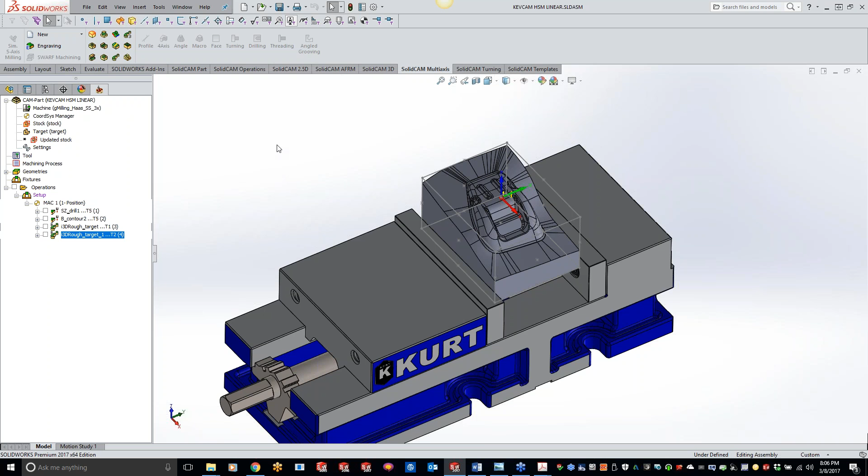So for this particular part here, we have everything roughed out. Just a standard part here, probed it up real nicely, roughed it out using 3D machining with a couple different size tools, and now we basically want to finish off this part. So first thing I'm going to do is add a 3D constant step over here.

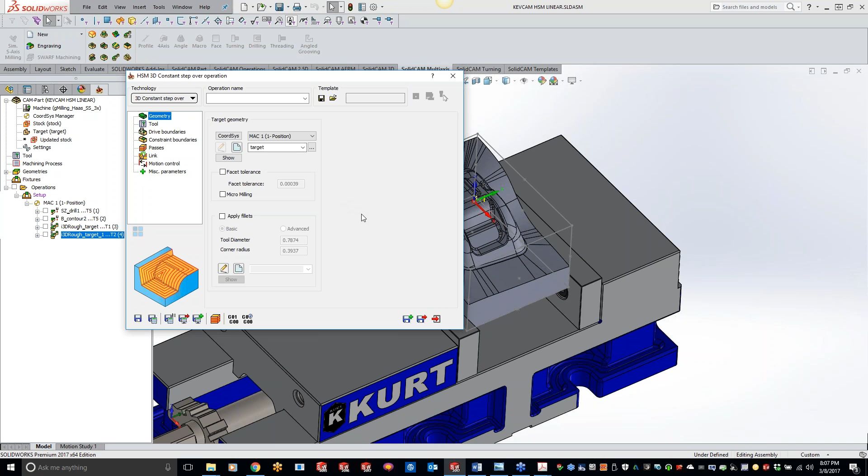Now, a lot of these menus are the same throughout all of HSM. There are a couple new ones in the 3D constant step over, and I'll go over those shortly, what those buttons do, and show you how the toolpath changes. There's a lot in here, and I know it looks a little overwhelming, and that's why we're going through this video series explaining these. But like I said in the past, the default values in here are pretty well set, and it all depends on the part that you're using.

So for this particular one, we'll get the ball rolling, and I'm going to machine it off with a ball end mill. Let me just see what I have. We'll use a 1/4 inch because we've got some pretty small areas in there. And then we'll come back and do a rest machining and clear out anything that's left over.

Now, 3D constant step over, I'll explain how the toolpath works. It's like what it's saying: it's constantly stepping over vertically and horizontally, and you can set those numbers up. This toolpath works great for a lot of different molds, a lot of different 3D parts. It's a very good general basic one, it lays a blanket over everything, getting a nice toolpath and a nice finish, depending on step overs. Like I said, it's one of my favorite HSM ones.

So what I'm going to do right now is leave my drive and my constraint boundaries the same. Like we've talked about before, drive is following the path that you want to go. Constraint is where you want to constrain it to. I'm going to leave those on automatic for right now, and I'm going to show you a couple different ways to do this.

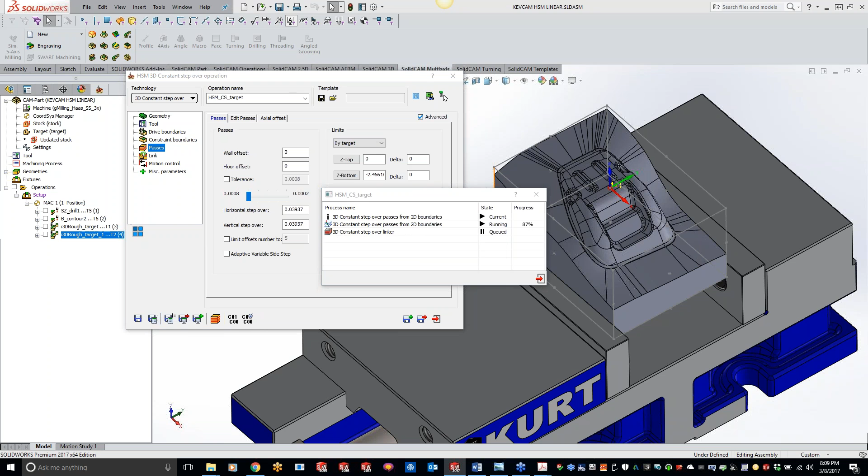All right. So now you can see we're starting in the center of the part and just doing basically a 3D constant step over. Now this particular one I'm not too thrilled with, because I really don't want to start in the center of my part. I want to start on the outside, which is easy enough.

So under your link page, one of the new buttons that pops up for this particular operation is from first pass, and it's basically reversing it. So do you want to start from the inside and go out, or outside and work your way in? So let's just switch that around real quick. And now we're starting on the outside and working our way in.

Now, one thing I want to show you guys here is if we do a straight down shot, you'll see it's doing a square. So right here, we get into the square corners and we're squaring off everything. And it's following that contour all the way in.

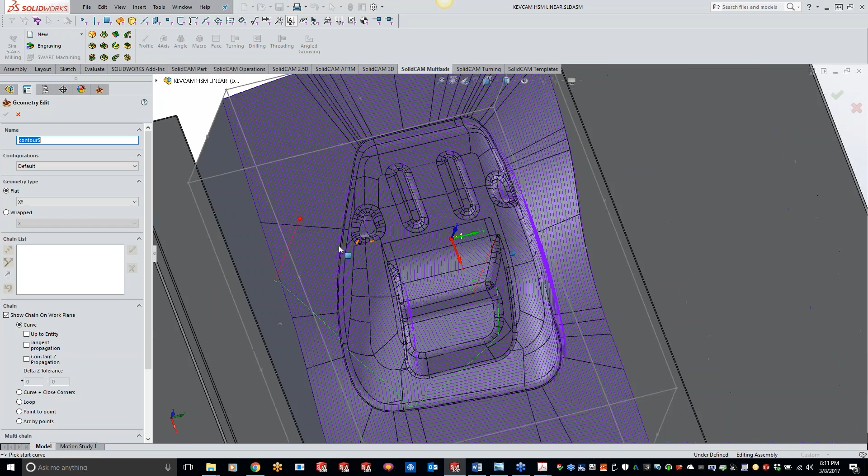Now, if you guys want a specific contour, what you can do is come into your drive right here and do a manual. Let me just get zoomed in here. And I'm just going to do my tangent propagation. Hit OK here. Now if I do save and calculate, my toolpath is actually going to follow that form around versus the outside box.

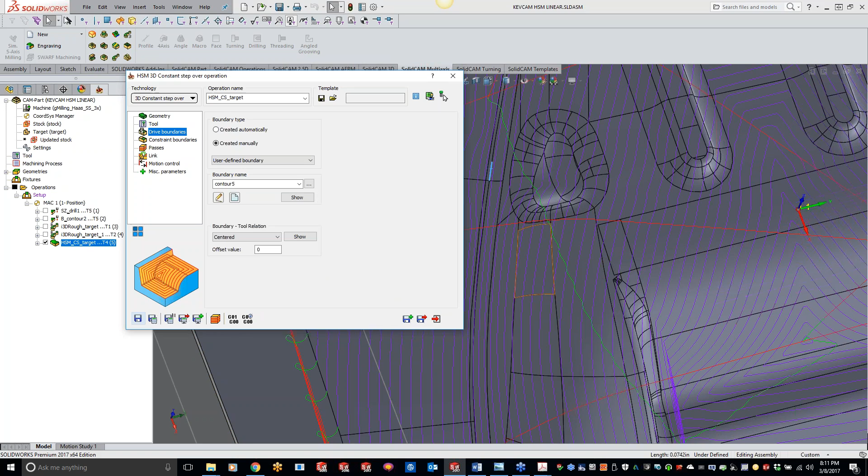You can zoom out here for you guys. And you can see now we're doing circles going around versus having those sharp corners there. We do have a little bit more repositions in here just because we're not doing those square corners. We're actually doing nice rounded corners in there. But it follows that central core in here, following the general shape of that by picking that as your drive boundary.

Now if I wanted to, what I could also do to clean up some of my repositions is, right now I'm set just to do one way. So now if I go to my link and do bidirectional, basically doing zigzag, it will actually clean up my toolpath. So now we get a pretty nice toolpath there working its way around. So instead of coming back around here, lifting up and then coming back over, now we're just doing a nice little zigzag pattern working our way out.

So that's a nice thing to have, is that drive, so you're telling it to follow that shape throughout. And that can be on another part that we're going to be doing here. We'll actually just draw a sketch just off in La La Land, and it will follow that particular contour.

Yeah, and Kevin, if I can just jump in real quick. That's really one of the greatest things that a lot of people don't really pay attention to when you're looking at the efficiency of the toolpath. Kevin just made a couple of quick adjustments there to make sure that you're not rapiding up, down, back, forth, all that sort of stuff. Just made a couple of quick adjustments to make sure that the tool is always engaged in the cut itself.

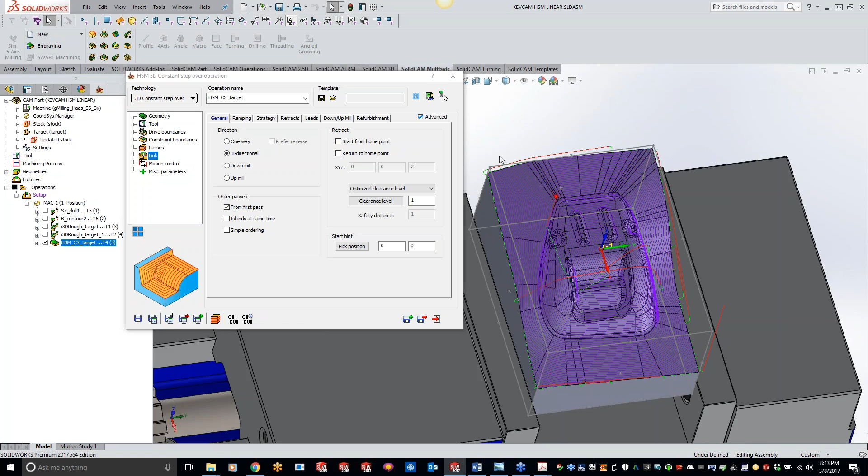Yeah, absolutely. There's a lot of stuff in here to control it, and we could even come in here and fine tweak our little links between slices if we wanted to, and fine tune it even more. But like I said, it all depends on how much time you want to spend on it. For a quick job, just trying to get out the door, basically just pick your tool, your drive, and your constraint, or you can just leave it automatic and pick bidirectional, save and calculate, run that part through and get it out the door instantly. So that's a nice feature.

Or, if you need to spend a little more time on it, you can come in there, and that's the nice thing I like about SolidCAM, is we don't lock you out of anything.

You know, when I used to do SurfCAM and MasterCAM, they really lock you out of a lot of features that you wish you had control of and you actually don't. But all right, enough comparing CAM systems here.

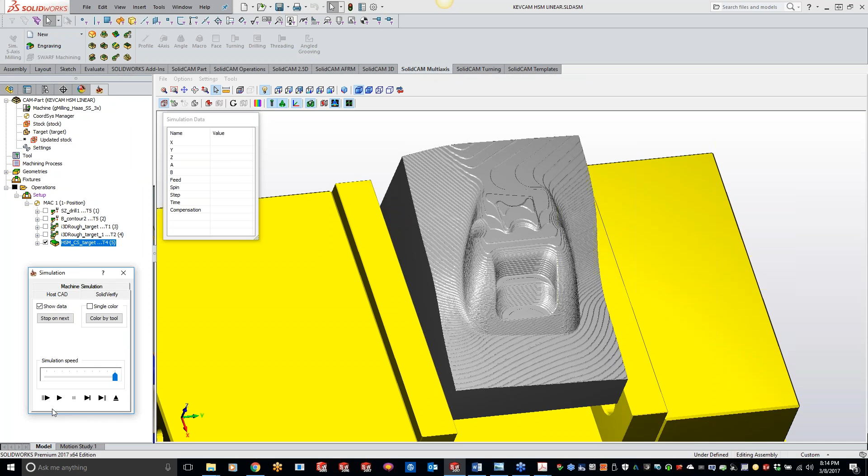Okay, so now we have our toolpath there. I'm liking what I see so far, so now I'm going to come back to my passes and tighten that up, because if we just do a SolidVerify right now and show you what it's going to look like, it's not going to be the prettiest because we're actually doing a 40 thou step over. But for a 3D constant step over, it's a pretty nice toolpath. Now let's get in here and tighten up our step overs so we get a little nicer finish.

And this is why I like, you know, the other thing too, oh, go ahead. Oh no, I'm sorry. I was just going to say, Kevin, that processing time is pretty impressive. Can you maybe talk a little bit about what you're running for a system right now? Yeah, this computer is actually fairly old. This is my smaller computer. It's a Dell 6800, running an i7 4th Gen, 8-core processor.

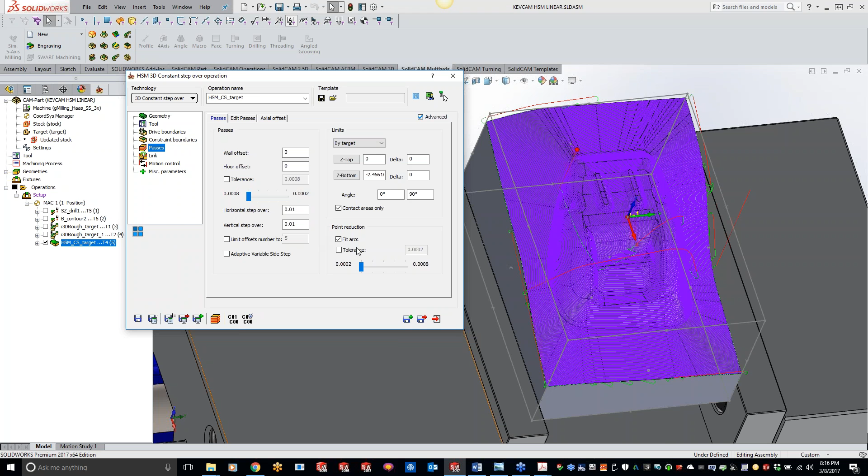That's the nice thing with the HSM module, 3D machining. Pretty much everything except for your standard profile face mill is going to use multi-core threading, meaning it's going to utilize all the processors. We actually had a guy a few months ago who had like 26 or 27 processors, and you don't even see a calculation time at all. It's just instant.

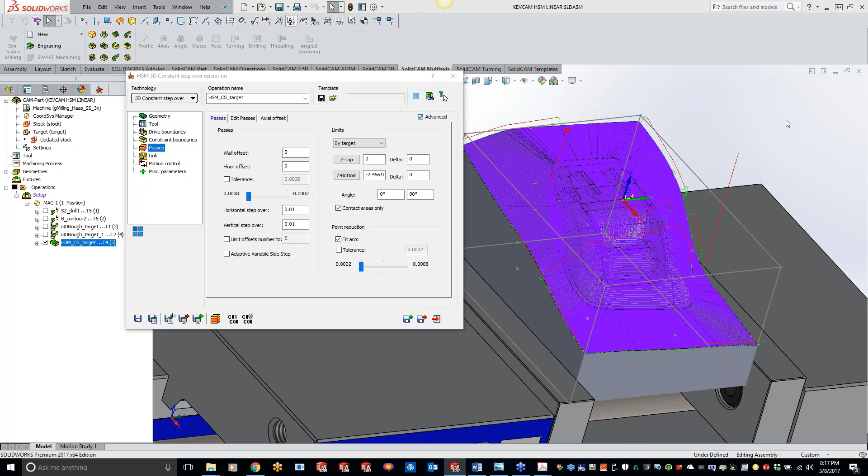Kevin, sorry to butt in again, but I just wanted to remind people that that's a standard feature in SolidCAM. If you're on a network that has multi-cores, 20 cores or 40 cores or whatever it is, it doesn't matter. SolidCAM will automatically look for those unused cores to process that toolpath, so it's never going to interrupt anything else you're doing on your network, but it'll take advantage of those unused cores to process even faster. A lot of other CAM companies charge a lot of money to do that, and that's a standard feature in SolidCAM.

So yeah, another nice feature is when you do the save and calculate in parallel, you can actually pick a different computer. So if you have a real powerhouse, a server computer, you can do all your calculations on that computer and keep programming and not have to wait for anything at all.

Totally. And that's why I like to say, keep your step overs large to start with. Get that toolpath looking nice. Now that we've tightened it up to 10 thou here, I really have to zoom in to get a good look at what's going on with the toolpath. So it's going to save you calculation time, and it's also going to be a little easier for you to see what's going on.

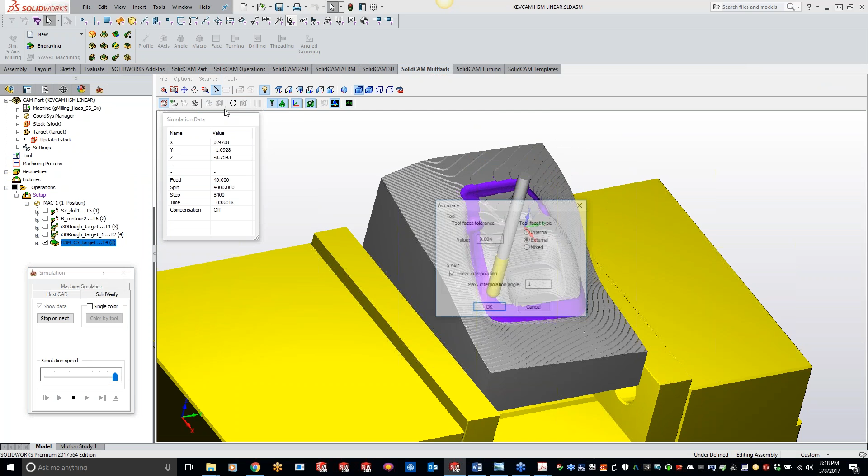Okay, so let's do a simulate here. Play it through real quick. I'm not running very accurate, only a 4 thou accuracy, so it's not going to look as pretty as it would on the machine. The only reason I have it cranked up to 4 is so we're not sitting here waiting for the simulation and putting you guys to sleep.

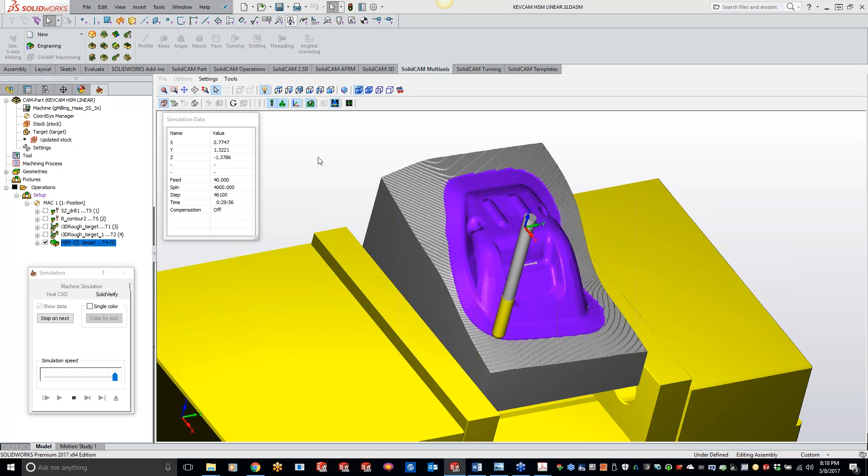But you can see you got a real nice finish on there, getting in all the areas that we need to. The tool is basically just going back and forth. Like I said, this is a real good, basic, easy toolpath to use for basically any 3D parts that you guys have.

So that goes into our next subject here, rest machining. We came in here with a 1/4-inch end mill, and obviously we have much smaller radii in here, areas that we can't reach with that 1/4-inch. So we want to come back and rest machine it out with a smaller tool. Easy enough.

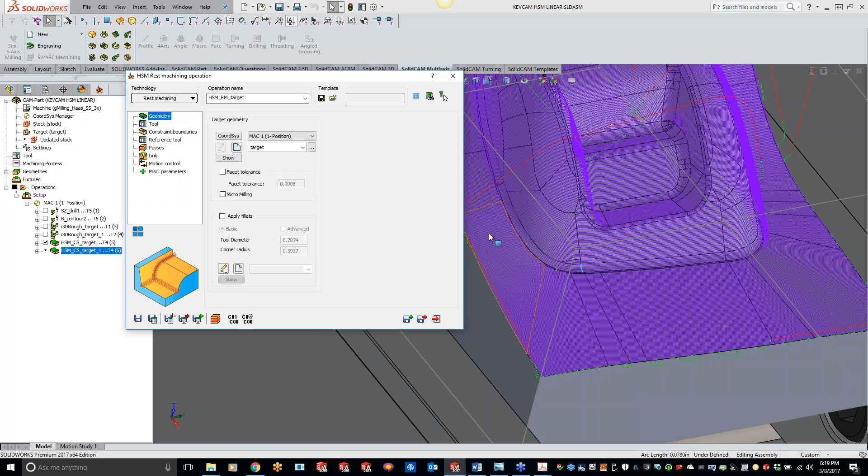All I'm going to do is just do save and copy. Switch this over to rest machining. I know we've talked about rest machining a little bit in the past here, but today we'll actually dig more into it and give you a little bit more detail about it. So switch it over to rest machining.

Going to grab a smaller tool here. I have something small. Yeah, a little 1/8 inch, perfect. And I'll just do my automatic here, so it will contain it to the entire part of the model here. Reference tool: what size tool were you running previous? So we can just put 0.25 in there. You can make it 0.26.

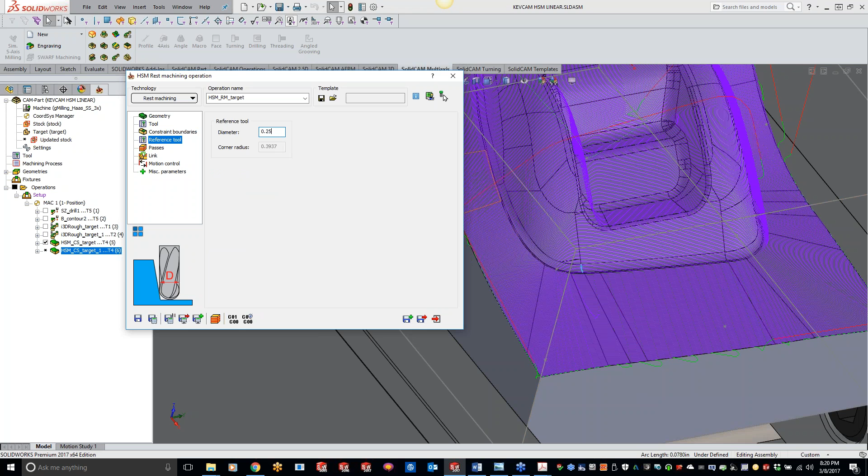Now this number will depend on, I'll actually play on a different part. We'll play with this number a little bit and show you the difference of what's going on there. And now passes. Same thing as before. You guys have your step down, step over. You got your bitangency angle here.

The cool thing now is when you pick rest machining, you have multiple different toolpath options. We can do spiral on surface, we can do a linear or a spiral. So depending on what kind of finish you guys are looking for, you can actually pick how you want it to rest the rest of the material out. And for those of you who don't know, rest material actually stands for remaining stock. So that's why it's called rest material.

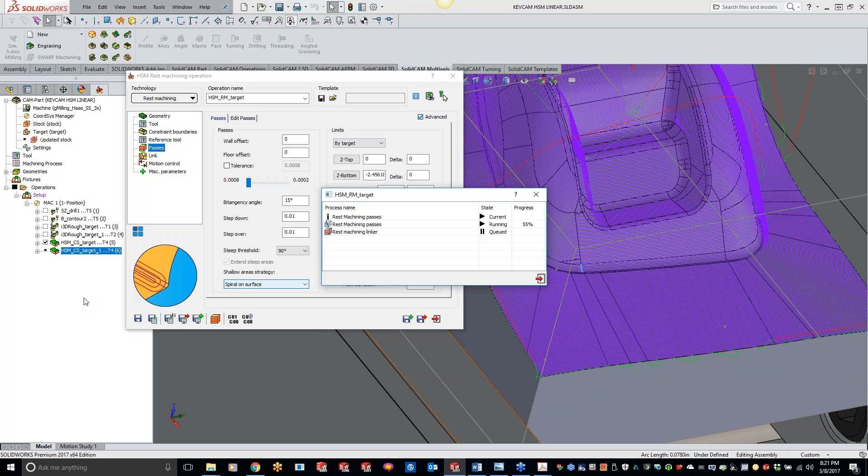So what we'll do is I'll just match my step down that I had in the previous operation, which was 10 thou here. And we'll do save and calculate. And now it comes in and cleans up all the areas that got left behind with that smaller tool. So not wasting any machine time machining the entire part over. It's just coming back and looking at what was left over from that previous tool based off that reference tool and machining it out, doing a nice spiral pattern in there, getting that material out of there.

And we're going to be covering a lot of the parts that we're going through tonight. We're actually going to do 3D constant stepover and then doing a rest. So a little bit of repetition for you guys, and hopefully you'll catch on a little better that way too. But same parameters. With any HSM, we can do an actual offset here. We can do a gouge check against fixture. You have all your strategies here.

The only thing with the HSM rest is you can only use it with a ball end mill or a lollipop cutter. And that's just so it can calculate what was left over. Coming in here with a straight flute end mill at an angle just isn't going to work. So it needs to be that ball end mill. But like I said, your strategies, your retracts, everything is all the same for HSM. So the only things really different are the reference tool, and then under your passes, how you want the toolpath to look.

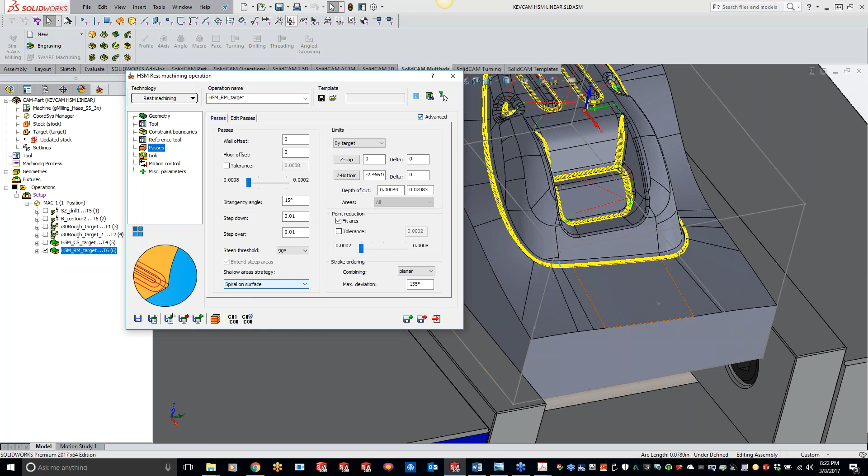So any questions at all with this particular part right here? All right. Yeah, not so far, Kevin. Just one request to maybe talk a little bit more, or even create a video on the comparison of different hardware specs. We were talking about multi-core processing. Oh, sure. Yeah, that could be a pretty good suggestion for a future class. Absolutely, just how to apply that.

So I'll have to get my nerd hat on and talk computers. Yeah, but you're not already? I mean. Oh yeah. Sorry, buddy. Can't help myself. There we go. Got rest.

Okay. So now, here's another part we did, and I already have some toolpath on here. We did a 3D machining, got everything roughed out with a little bit smaller tool here. And before we did the HSM constant Z, so we're getting that nice wall finish in here. And this one we're just going to be covering rest machining only. So let me get in this one, simulate, do a solid verify, get everything updated, and you'll see what we're left over with here. Do a stock target.

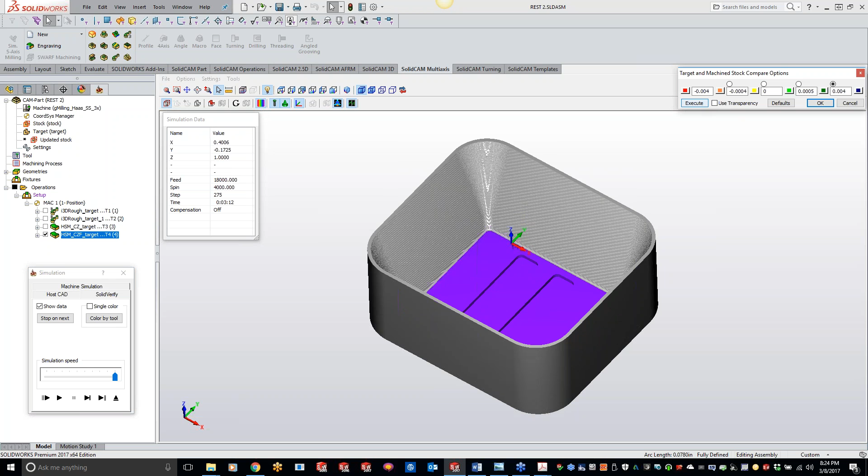So we have some material still in those corners right there, and a little bit along that bottom radii right there. So what we're going to do is just come in here with a rest machining. And you don't have to do a save and copy. You can definitely come in here, do your add milling, 3D HSM. We got rest already selected here, and grab a small little tool here. Let's see.

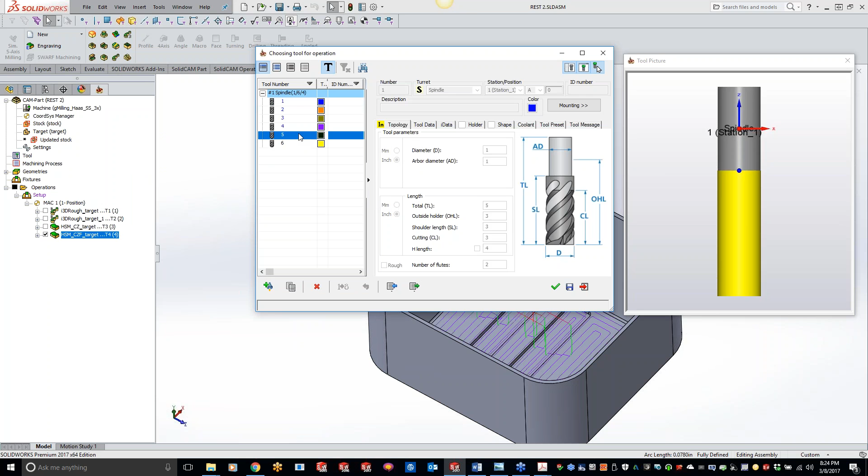Okay, go with that. 1/8 inch. Let it be automatic. I basically want to rest out any material that's left over. Reference tool, we were using I think it was a 375 cutter, so we'll just put 375 in here. And passes.

Test my memory here, I'm thinking it's 7 thou. I'm just going to save it real quick here because I want to make sure my step over was 7 on this one. Oh, that's our horizontal, sorry. And our step down, we're at 13 thou. Okay, so I can come in here and do that same 13 thou.

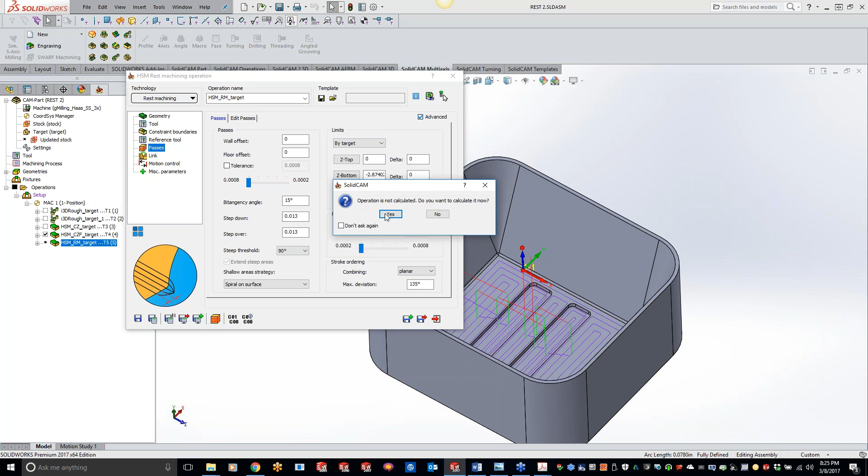That's a nice thing too: if you just need to get out of here real quick and don't want to bother doing save and calculate, you can just hit the save button, exit, and everything's saved for you. And now it's basically looking for where any material is left over. Just turn on this.

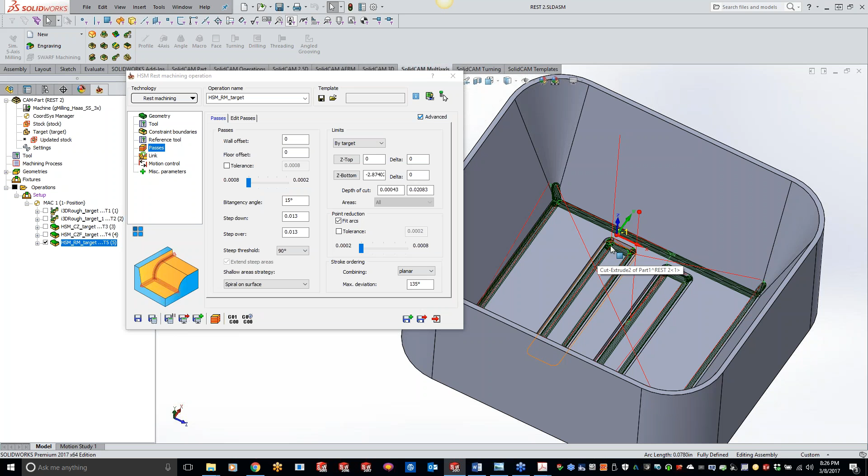So now I'm coming down here in the bottom. I already came in here with a flat end mill and cleaned all that up, so I really don't need to touch that again. To fix that, just click your Z bottom and pick that area, save and calculate, and that will avoid that area because I have no need to go back in there with a ball end mill and clean out corners.

So you can see right here, it's coming in, cleaning out those areas, working its way around using that spiral feature. We can do linear, probably not good on this one, or a spiral that goes past, but we're not going past the material at all. So for this one we'll leave it on spiral on surface. If we zoom in, we're doing a nice spiral starting from the inside working our way out and getting that leftover material.

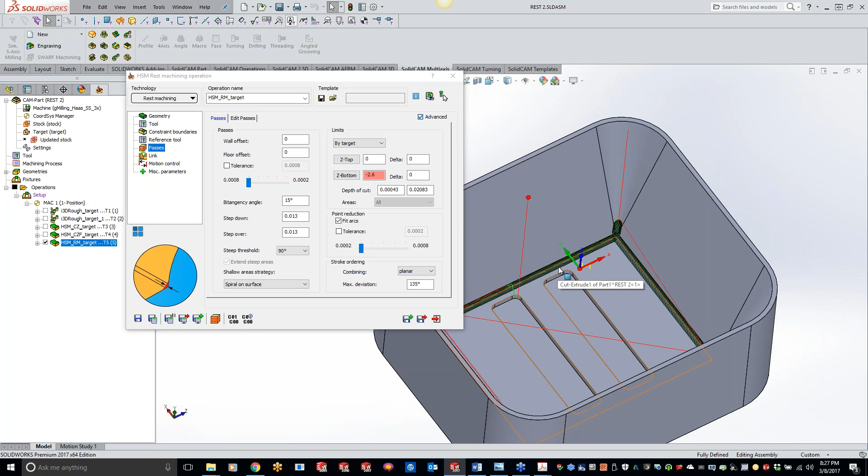Now, we'll still have some material left over with that 1/8 inch. So I can come back again and do another rest. I'll do a save and copy here, and we'll switch to a smaller tool. Constraint boundaries are going to be the same. The reference, now I'm going to show you the difference here. Technically we had a 0.125 cutter in there. If I leave it at 375, it's pretty much going to follow the same steps as what was left over from this one.

If I just do a save and calculate real quick, and turn that one off, it's pretty much the same toolpath as before, because we still had that 375 reference in there. Now if we do our 0.125 here, it's just going to clean up what was left over. But you can also change this number if you want a little more overlap from the previous tool, so you could do like 200 thou, save and calculate.

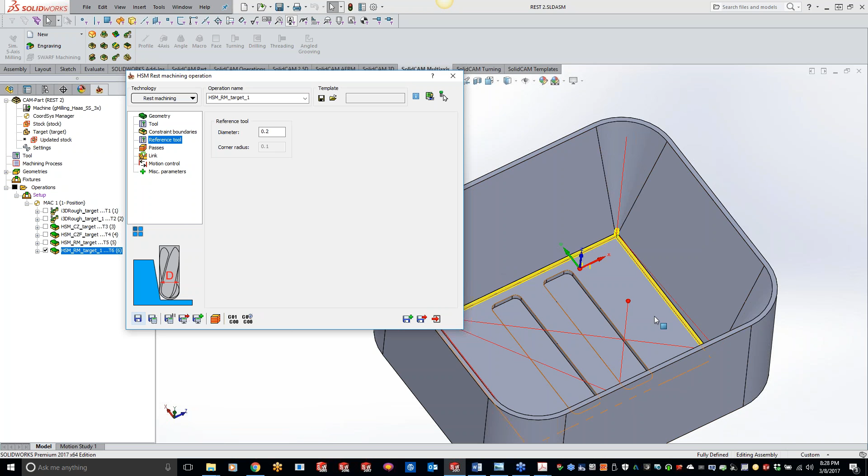And now it's cleaning up what was left over from a 200 thou diameter tool, even though we were running a 125. So we'll get a little overlap and a nicer blend doing it that way when you're doing multiple step downs using rest machining. Like I said, not much to this part. I really want to focus on how the rest works, cleaning up what was left over.

Now, with the levels, if you want to contain it height-wise, that's going to be right here in your passes. So maybe instead of Z top, I want to start a little farther down. I can click somewhere down here, and it wouldn't start until that start point. So, any questions on this part right here?

No, Kevin, I don't see any questions coming into the chat area. One thing I wanted to ask you: when you're doing your part rotation and zooming, that seems really smooth. Are you doing something different, or what are you using to show that? Let me show you here. If you're the boss or you have bosses, get them to spend money on this. Let's see, what is it called? 3Dconnexion.

Oh, I thought so. Yeah, I thought you were doing something kind of cool there. That's killer.

So for you guys, you can get these pretty cheap. So here we'll do 3D mouse. So here is a Spaceball, is basically what I call them, or a space mouse. This is what I use to pan, zoom in and out, rotate. It's a little puck. Well, actually, I have the big monster here, but I can get densities, volume, all that popping up. I can actually read my email up on these screens too, but they have a bunch of shortcut buttons.

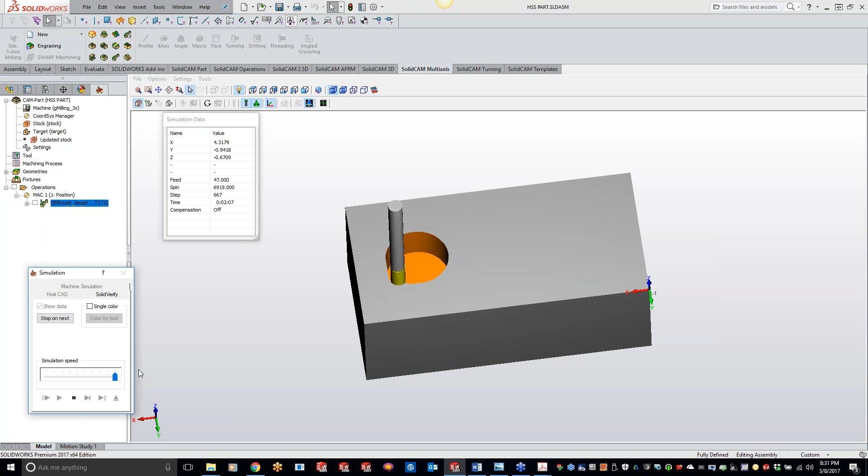But if you guys are looking for something simple, easy, these little pucks right here, I think they're $100, and it really makes your life a lot easier as a rotation. For those of you guys that are in the Solid Verify a lot, you'll notice that the zoom feature, since it's not our proprietary product for the Solid Verify, is a little bit different. When you guys are using the Spaceball, let me just do a simulate here real quick. Get this roughed out.

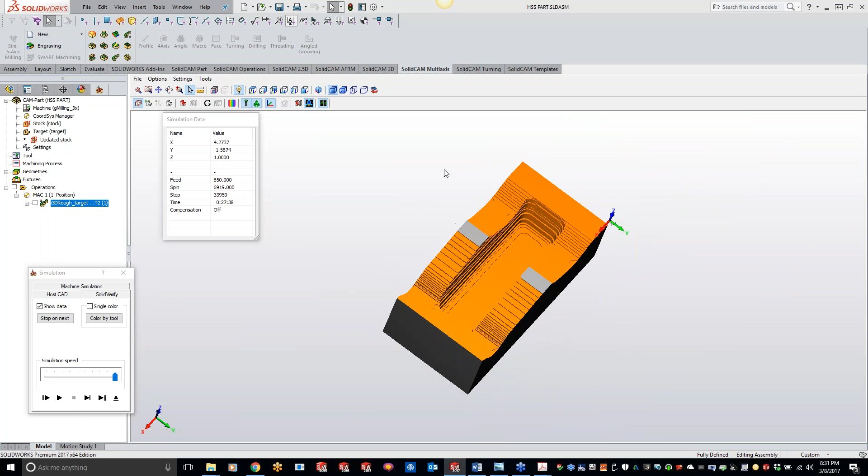All right, so normally, here I'm rotating with my mouse, and if I need to zoom into an area, like this top corner, I can't get it. You can do the mouse jockey doing it that way, or you can use your Spaceball, and I'll just put my mouse kind of off the screen, and you can really zoom around. It really makes things a lot easier. Everything is consistently the same all the way through, so if you guys are looking to make your life a little bit easier, that's the way to do her.

Yeah, Kevin, wasn't trying to derail anything. That's really a pretty important part of this. When you're looking at your design, looking at the model, trying to see it from all sides, you have complete control over that. So just wanted to bring that up.

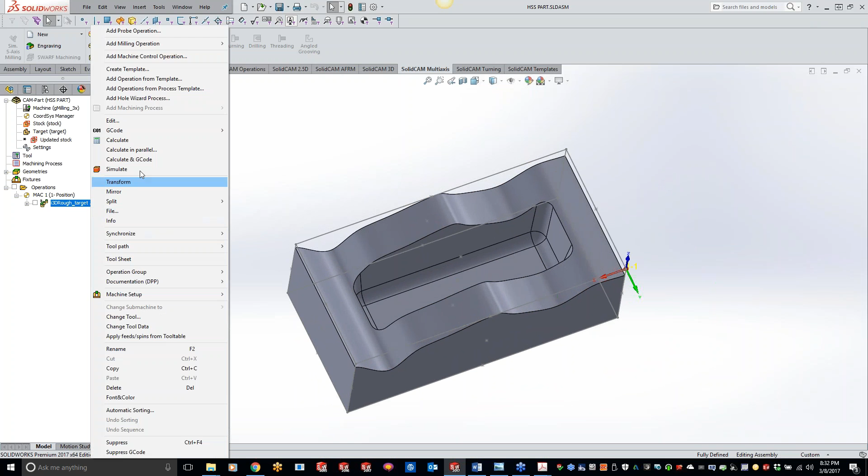The efficiency of it was really nice too, because if you guys do spend a little bit more, you have these little buttons right here, and you can set those up for whatever you want. So if you want to do a quick sketch, you just hit one of the shortcut buttons and set it up. So it's pretty cool, real easy to use. So yeah, very nice. Okay, so what we'll do is go into our 3D constant step over.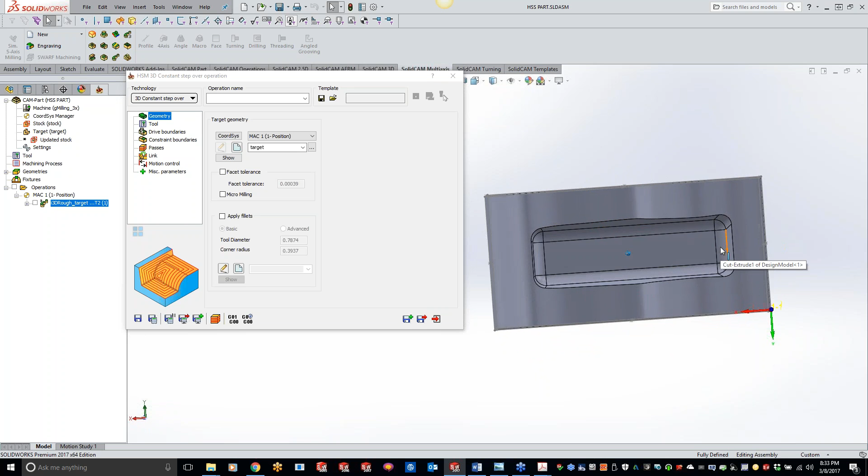This is a part we kind of covered, I think we were just talking about HSS Express a couple months ago, but now what I want to do is basically machine this part throughout. So if we do a top-down view here, you'll actually notice my walls are tapered, so they're not just straight up and down walls. And we have a nice radius at the bottom with a flat floor, and some really kind of funky top geometry here.

With these toolpaths, we can do linear, we can use HSS, there's tons of different toolpaths out there, and it's whatever you guys more want. Like I said, we want to give you as many options as possible. But I'll just kind of show you what it's going to look like here with a 3D constant step over. Go ahead and grab a tool here. Yeah, we'll go with a 1/4 inch.

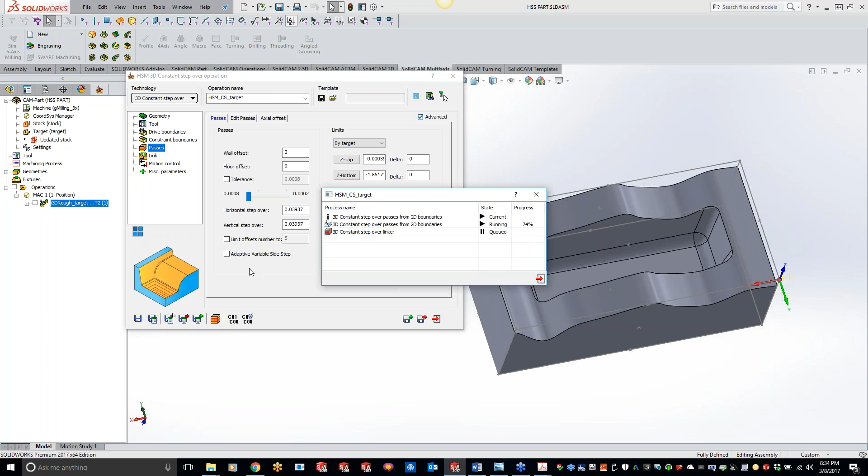I'm going to leave my drive and constraint all the same. Passes, I'm going to leave everything where it is. Let's just do a quick save and calculate, and throw our toolpath on there. So we're starting at the center, working our way out. I kind of want to reverse that here, so let's start on the outside and work our way in.

Now, like I was talking before, if you guys wanted to keep those edges rounded instead of square, we can come in here and do our drive. Kind of follow the general shape of that cutout in there.

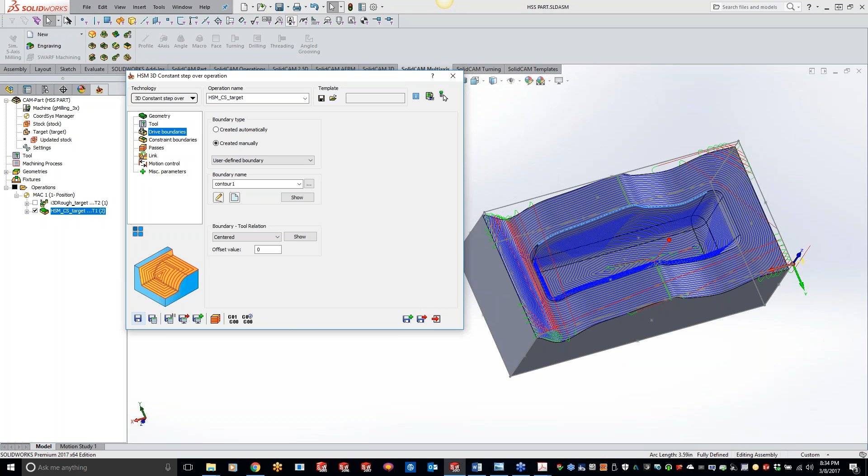And now we have nice rounded corners going all the way around. Now, one other thing I can do is turn it to bidirectional so we can get some zigzag, a little bit less retracts going on.

And, Kevin, as you're doing that, I just have to say, if you're looking for complete toolpath control, this is pretty much it. It's amazing that you can just make these simple corrections and have all of that control over the toolpath just like that. That's immediate toolpath control. It's pretty much unheard of. Yeah, you really don't see that. Real nice.

So right here, I got my toolpath, what I'm looking for. Come back, let's tighten up our tolerance. Let's just do a 10th step over, real small scallop. Looking for a pretty decent finish here. Save and calculate. And we'll play this through. There we go. And let's go ahead and do a solid verify.

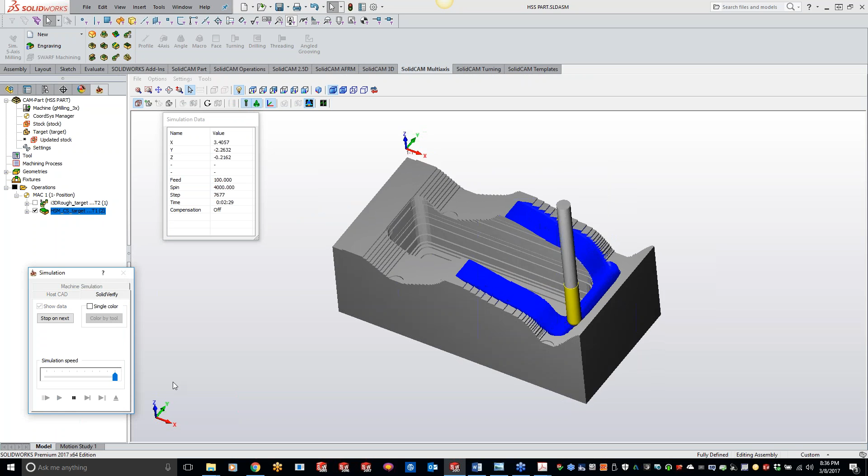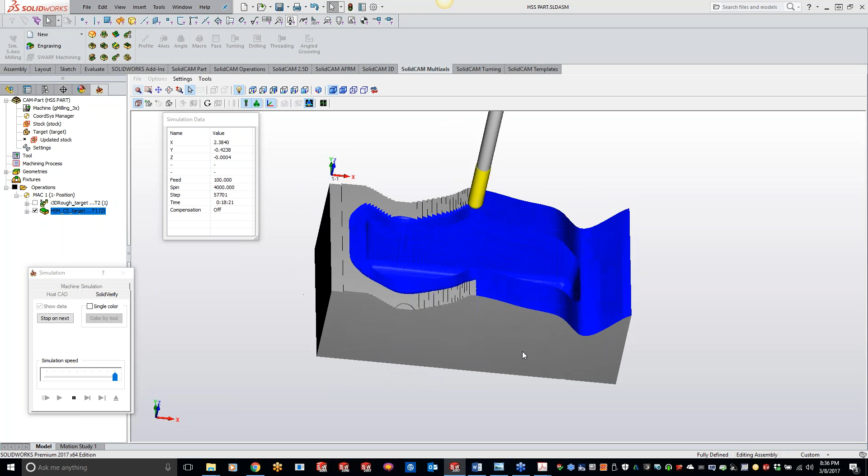Yeah, even that solid verify, it just gives you such a great picture of what it's going to look like as it hits the machine tool. Absolutely. And like I said, I'm running these tolerances. Let's see, what are we running for accuracy here? Yeah, we're still running 4th. Normally if I was doing this, I would definitely have those tightened up.

If you guys are looking for a good recommendation, it depends on what you're looking for. The more detail, the tighter the tolerance you want to go, but the longer it's going to take to calculate. I like to have mine right around 5/10 to 1/10. That way I can really zoom into a tight corner and see exactly what I'm going to see on the machine. But just for time's sake, I don't want to put you guys to sleep waiting for it to do the toolpath.

So that's a little tough thing about HSM and doing 3D parts: they do take a little bit of time to do the simulation just because there's so much surface area. This part is 5 inches by 2.5 inches, and we're doing a toolpath every 10th step over and step down, so pretty tight there.

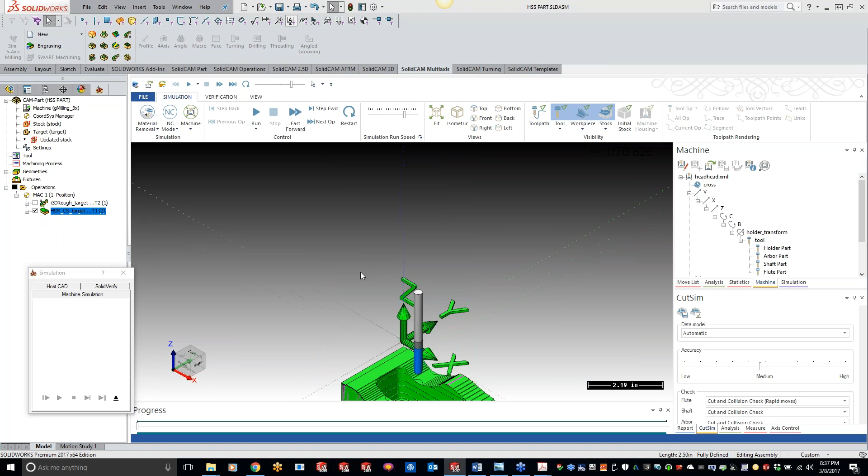Yeah, and Kevin, I was just going to mention, if you really want to take this to a whole different level, we do offer a product called Machine Simulation. This will obviously do crash detection with tool holders and things like that, but you could take it to a different level where you can show full machine simulation, with guarding, fixturing, all of that sort of stuff.

And again, Kevin, not trying to get you off course here. He's making me find a machine sim for you guys right now. I should have had it. Well, you know me, Kevin. I have to set the bar as high as possible. Throw you right into the fire. We can use a Haas UMC. And Kevin hates me right now. That's what he's thinking, I know it. I can feel it. Hopefully everybody's laughing right now. Well, you can't hear it, but you can feel it.

All right, and the only thing I need to find is 1.85. So I'm just going to put that in my setup for my Z. 1.85. And now let's do a simulation. Machine sim.

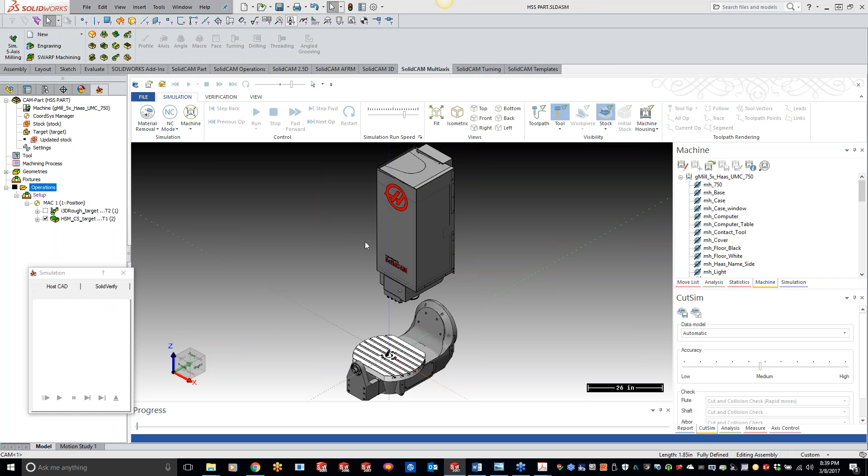Yeah, and Kevin is completely doing this out of pity for me for mentioning it. No, I appreciate you doing this, Kevin, because this is really important, especially if you're doing more detailed work, particularly mill turn. This level of detail can be very important. You'd much rather see any errors here rather than out on the shop floor. They tend to be a little bit cheaper on this side of things.

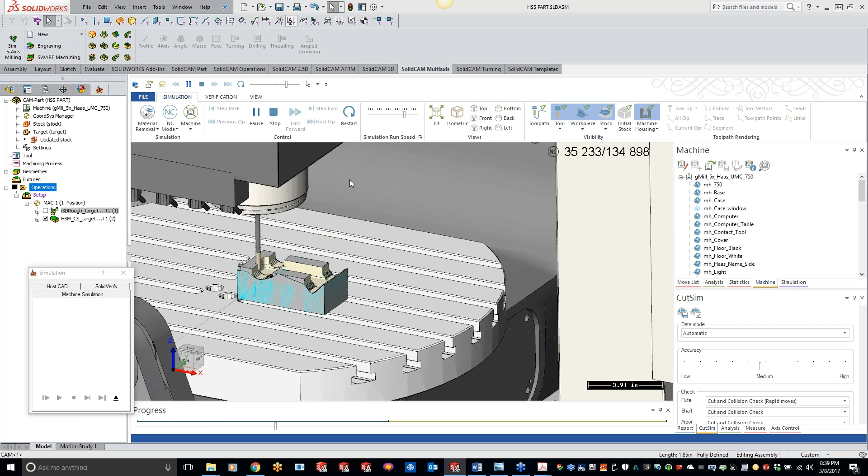Yeah, definitely. And the cool part is this is all built into your post processor, so anything that comes out of the post is what you're going to see on the machine itself. And it's relatively inexpensive to add to whatever level package you have. Yeah, and you guys see right now I've kind of got the tool in La La Land, and that's just because I didn't put a tool holder on this one right here.

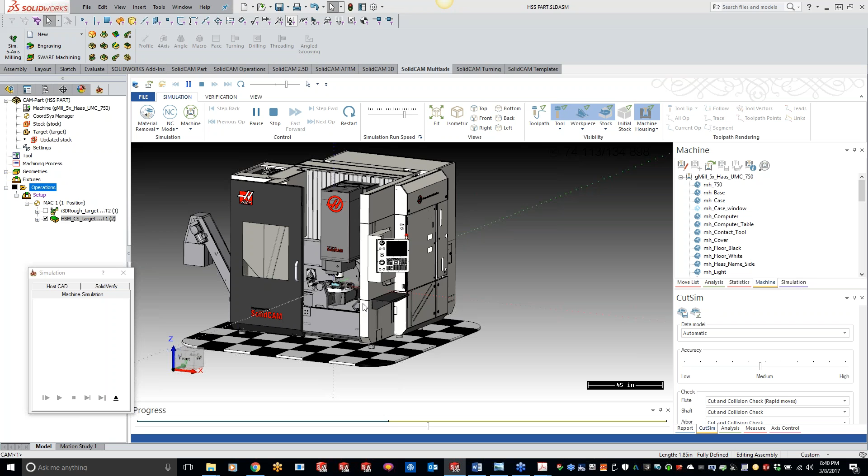Wasn't expecting to do machine sim on it, so I didn't have a holder on there. But normally you would see your tool holder in there with full crash detection and probably a vise on there too. For the guys that haven't really seen the machine sim, you can see the whole machine doing everything, or if you don't want to see everything, we can turn off the outside boundaries and just get the 5-axis in the head.

So. Yeah, very cool. Thanks for doing that, Kevin. I appreciate it.

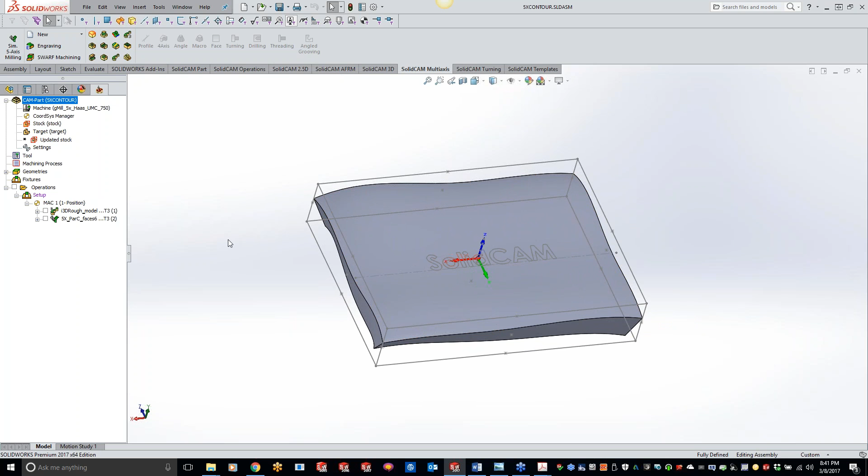So now let's get into some more 3D constant step over. Okay, we're doing a 5-axis contour now. We did this part last week doing the HSM boundary machining. I just want to revisit this one and show you what it's going to look like with the 3D constant step over. Super, super easy, and that's why I really like this toolpath. It's really easy to use.

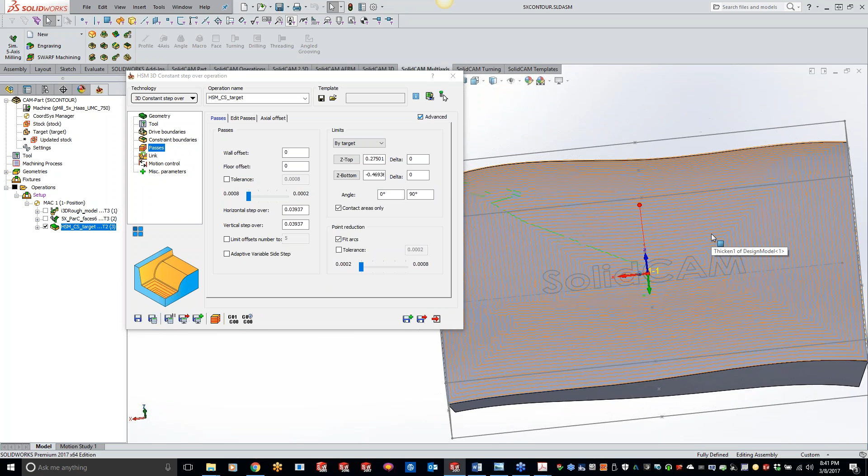So we'll go ahead and grab our tool here, and I'm going to leave my drive constraints all set to automatic. Passes, we'll leave it open right now. Save and calculate. Let's see what we have. A pretty simplified, easy 3D toolpath there. Now, I am starting from the outside, working my way in.

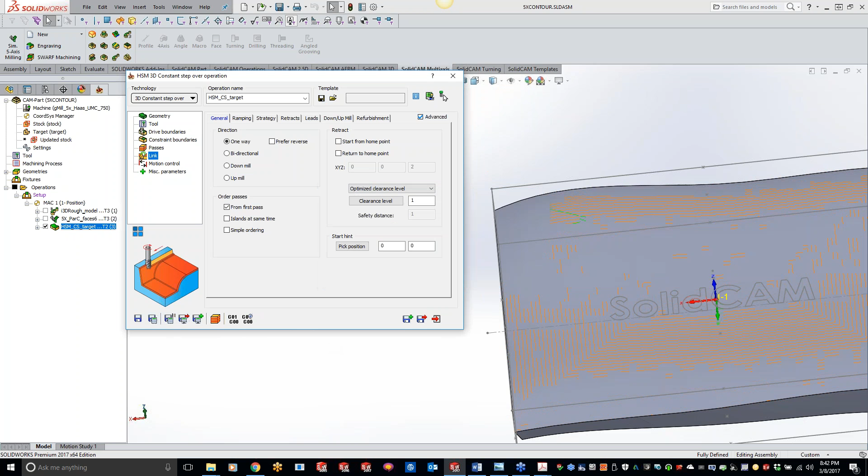If you always want to start on the outside and work your way in, and it's defaulted to start from the center and work its way out, easy enough. All you have to do is turn this particular feature on and hit the save button as a template. Then you can load those templates in, so every time you start an HSM operation, it's going to automatically have that checkbox turned on for you. So we'll start from the outside, work our way in, and easy as that. Let's go do a solid verify here.

Play it through. And got a nice toolpath there. Like I said, we do have a fairly large step over, so you're going to see all your little lines in there. Keep those wide open until you get what you are looking for. Now we can come back and, if you're looking for a mirror finish, not 50, maybe we could do even 5 thou, save and calculate. This part could come off and you wouldn't even have to touch it. It would almost look like a polished mirror.

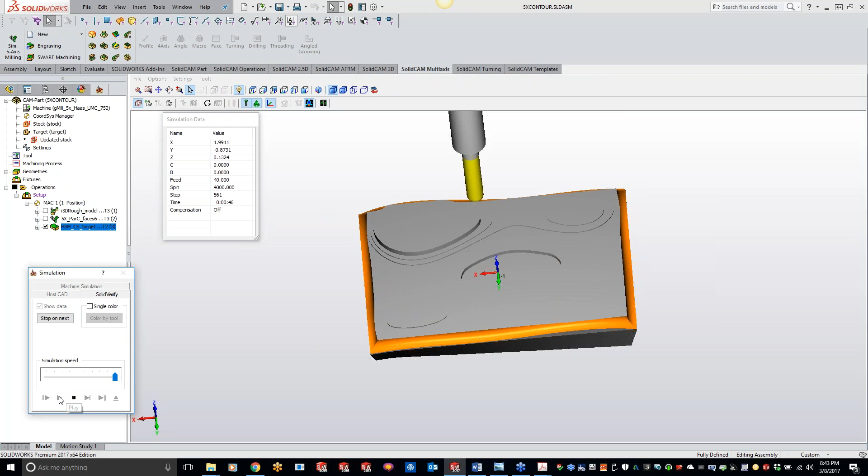Simulate here, and we'll play this through for a quick bit because it's going to be a lot of step overs, but you can definitely see the surface finish is going to be much cleaner. We are running a large tolerance here, so it's not going to look as nice as it would if I tightened up the tolerance, but you're not seeing any of those step over, scallop, cusp heights, or anything like that.

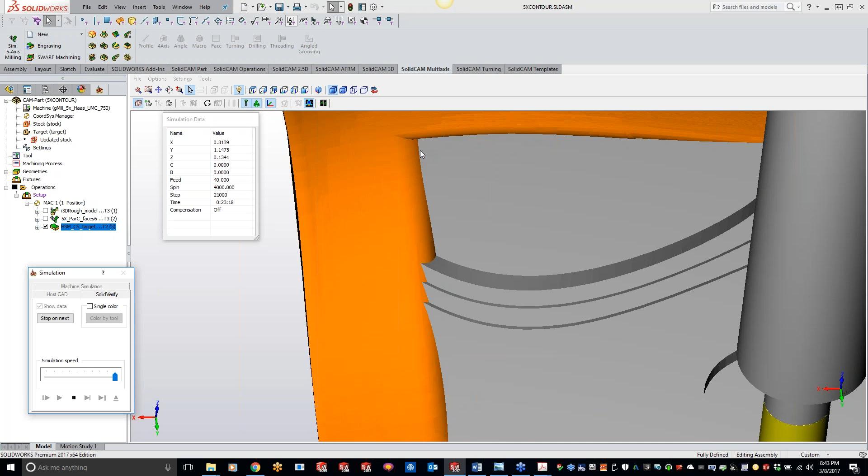But the flip side is, the tighter the tolerance, or the tighter you make that step over, the more cycle time you're going to have on the machine. So it's totally up to you. If you're looking for that mirror finish instantly, crank it down to 2 thou, 5 thou, 8 thou. If you're looking for a rougher finish but faster cycle time, and then you come back with a little sandpaper, open that up to 15 thou.

But Kevin, I think what really needs to be discussed here is that if you use 3D machining to rough out that surface area, you don't need that intermediary step like the semi-finish. Yep. And I'm sure that's what you're trying to show here. That's really the advantage. You don't have to worry about having an intermediary step, machining again, and then going back over the surface to take off that last 5 or 10 thousandths. You can do that pretty much all at the same time.

Yeah, so absolutely. And like, go ahead. No, I was gonna say, if you guys wanted to, right now we have it pretty well roughed out. But if we get out of here, go back to our 3D machining, maybe instead of 15 on the wall, we just want to leave 5, so we're not overloading our tool here.

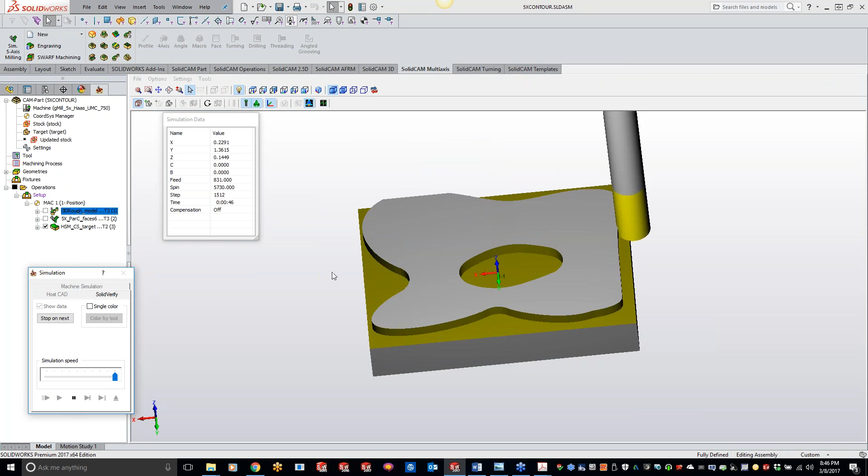That cold that will never go away. I was gonna say, I do understand that there's a lot of marijuana up in your area there. Yeah, right. Oh, I'm kidding. I'm joking.

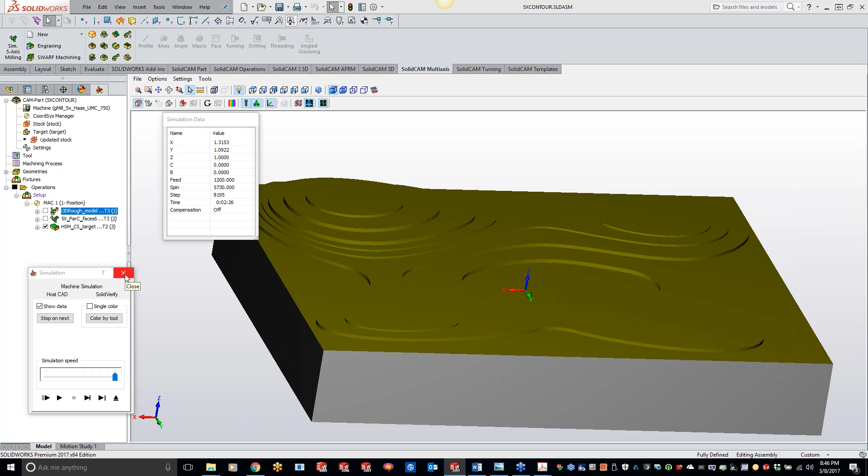Okay, so now you'll see it actually finishes up even better here. A little bit more step downs in there, just roughing it out, which would make it even easier on that ball end mill. But like Brendan was saying, if you guys are using 3D machining, there is no need to do a semi-finish pass on 90% of these tool paths out there. So okay, we'll mosey on to another part here.

Now this week I tried to get as many parts as possible so I could show you guys as much as I could. This is the one I'm looking for. Okay, so you guys remember seeing this part a couple times. We covered it using the horizontal, linear, spiral, but it was only working on specific areas. Now with this part I can cover the entire area and basically have a finished part without having to come back with anything else.

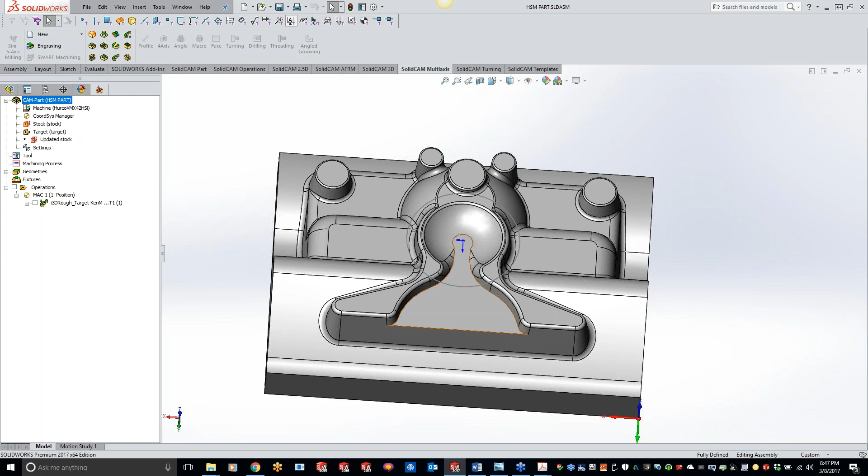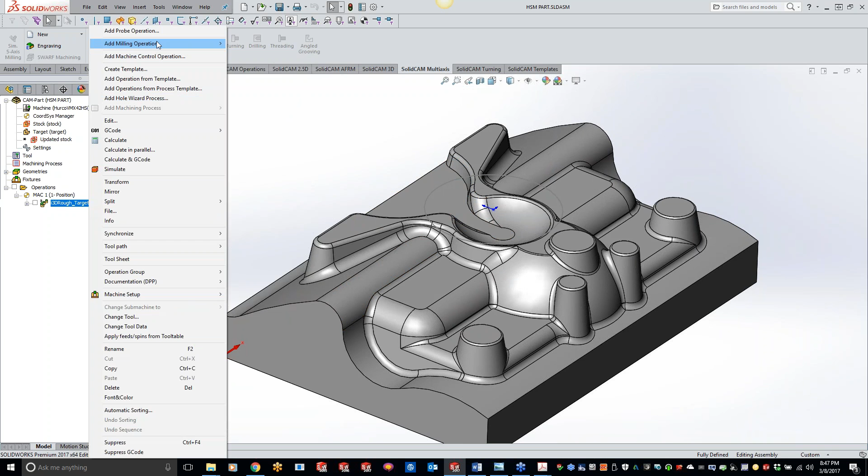The only spot I won't be able to fully get is, since I'm running a ball end mill, we have sharp 90-degree corners here and here, so we'll have a little bit of material there, but we can just buzz it out with a quick profile, or our HSM horizontal that we covered in the previous night classes. So we'll come in here and do our 3D HSM, and I am going to do my 3D constant step over.

I'll go with that 1/4 inch ball end mill. I'm going to leave my drive and my constraint boundaries all the same. Passes, leave everything the same. I know I want to start from the outside, so I'm going to reverse it before I hit save and calculate. And we'll get some toolpath on there. This part is fairly large, so the calculation time takes just a hair bit longer.

Well, and again, Ken, that really wasn't that long. And just a reminder for the other people that have joined us, multi-core processing, standard feature. Yep. Okay, so we're starting on the outside, working our way in.

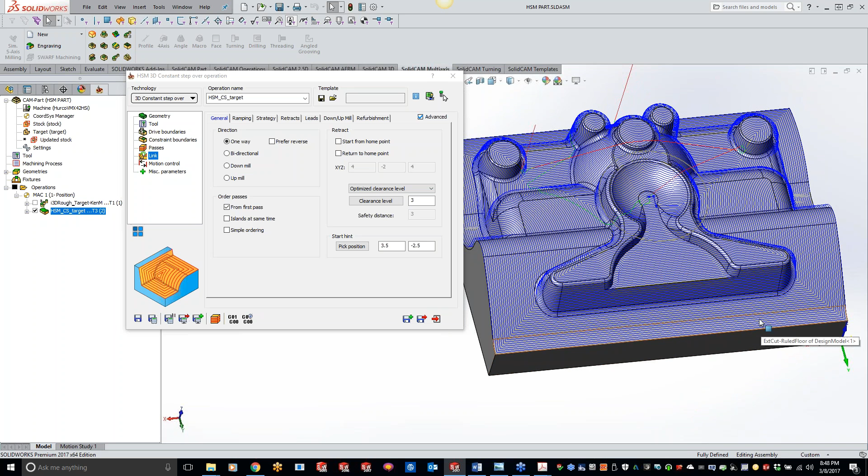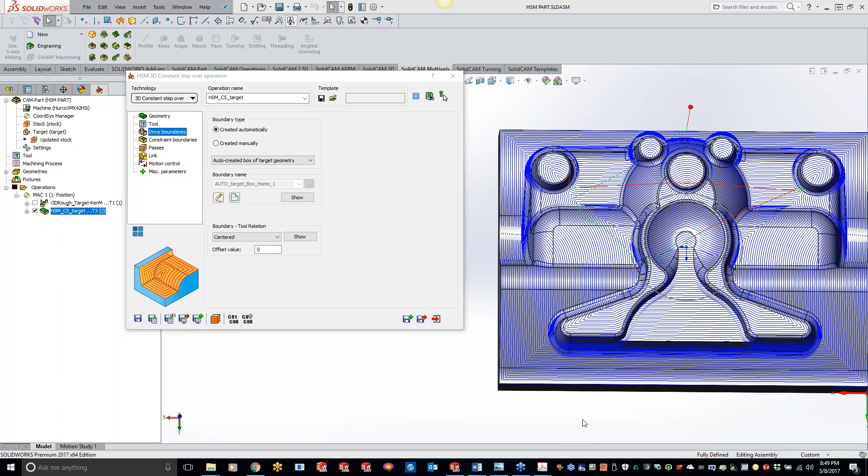Now, one thing I want to throw out there is, with that drive, I have a lot of circles, especially this inner circle here, and a lot of round areas coming off of that. So instead of following the outside silhouette of our square, which is picked by our automatic target, I'm going to tell it to do a circle here. So what I did is, let me turn this toolpath off, I threw a quick circle in there. Let's start from scratch.

I want to do a circle from right inside there. So I'm going to give it a somewhat top down, do a sketch, a quick little circle, and accept that. Now I can come into my manual, grab that circle I just picked, and do a save and calculate. Now it's going to follow that circle geometry, and we'll get a little bit nicer finish on these circle areas right here.

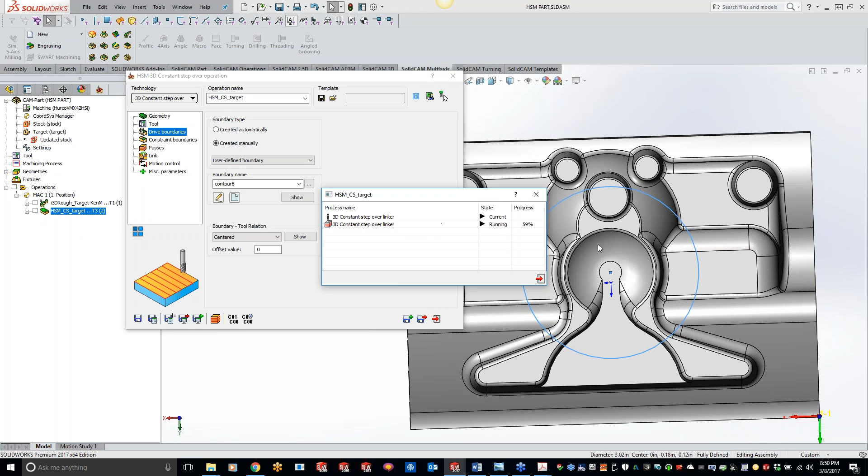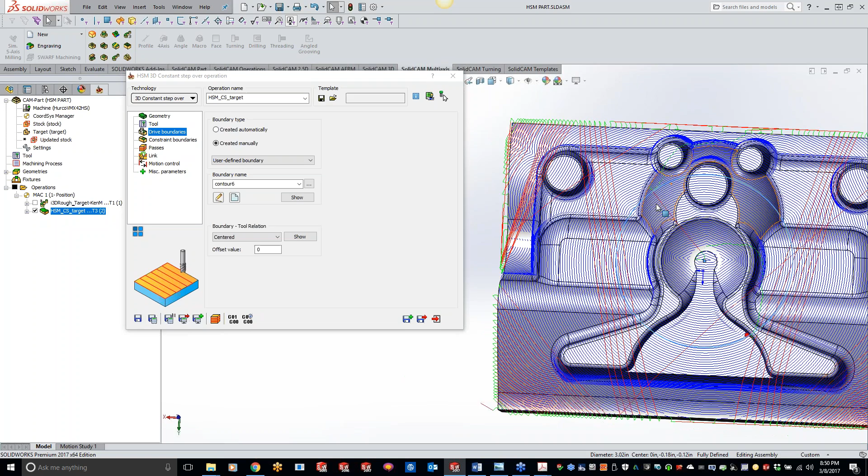But that's the nice thing, we can make all these changes right on the fly, draw and sketch geometry in there, and this sketch will never go back to the original design model. So, okay, now we're doing circles in here. On the outside we're still following that same flow of the circle going all the way around. Should get a little bit nicer finish in there. Now to clean up my path a little bit, I'll go to my bidirectional here.

And I'm happy. It looks good. Eliminate a lot of my repositions there. Should have a nice toolpath or a nice finish on that particular part. So now I'm going to come in here, and like I was saying before, let's tighten it up. We'll just do a 10th step over, save and calculate.

And we are using a 1/4" end mill, and we do have some smaller areas in here. So what we'll actually do is, once this is done calculating, we'll come back in there and do our rest machining, and basically just finish off the areas that it wasn't able to reach with that 1/4" end mill. And like I said, that 3D constant step over, the way that the path is coming along with the tool stepping up and over, is a great spot to utilize that rest machining in there. So.

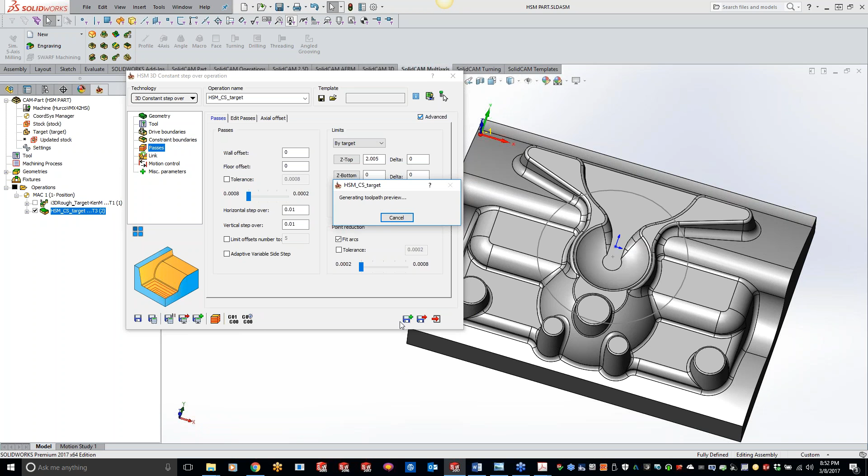Yeah, Kevin, that looks just super cool. Super accurate. I mean, that's amazing. It's a beautiful toolpath. And it's so easy to use. That's why, like I said, it's one of my favorite ones to use here.

Okay, so now we're going to get a real nice looking finish in there. I did a hundredth step over and whatnot, but I know I still have material in there. I can do my solid verify and do my stock targeting comparison and see it. But what I'm basically going to do is come in here, make a copy, switch this over to rest machining, and we'll just go down one size in tool here.

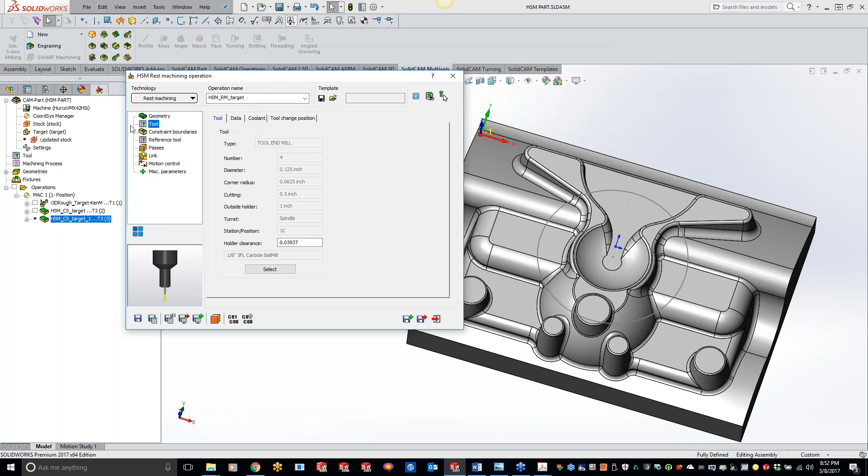And I'm just going to do the automatic because I wanted to find everything that was left over, not just contained to that circle. Reference tool, we're using a 1/4. Passes, I'm going to leave it open for right now. And you'll see that we come in here and clean up all the areas that were left over.

Now, a 39 thou step over is going to be quite large for that 1/8 inch. So, like I said before, I'm going to match what I had as a step over prior with using that 3D constant step over here. Save and calculate. And there we go. Cleaning up all that material that was left over.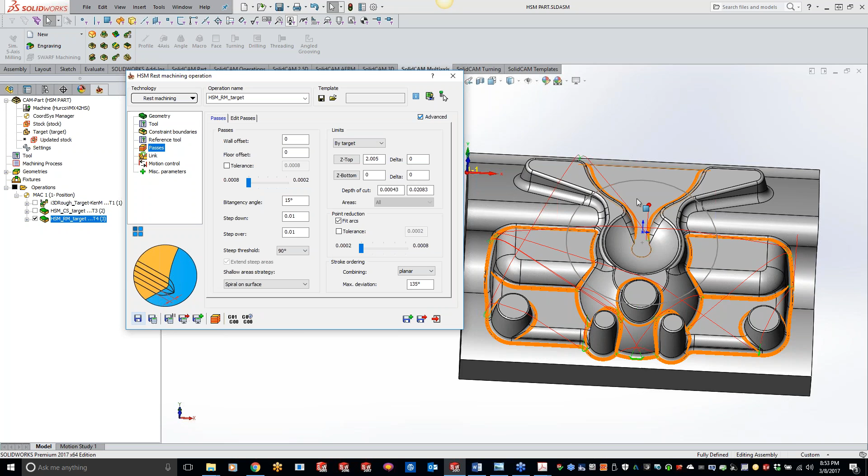Now, like I was saying before, the only spot that I'm not going to be able to get into is that straight wall right over here. And, like I said, we can come in here with horizontal, get that machined out with a flat end mill, or just a pocket operation or area machining operation, whatever you guys want. But definitely it makes programming real easy using that 3D constant step over, coming back, clean it up with a rest machining, and you're done. So any questions with this part right here before we go on to the next one?

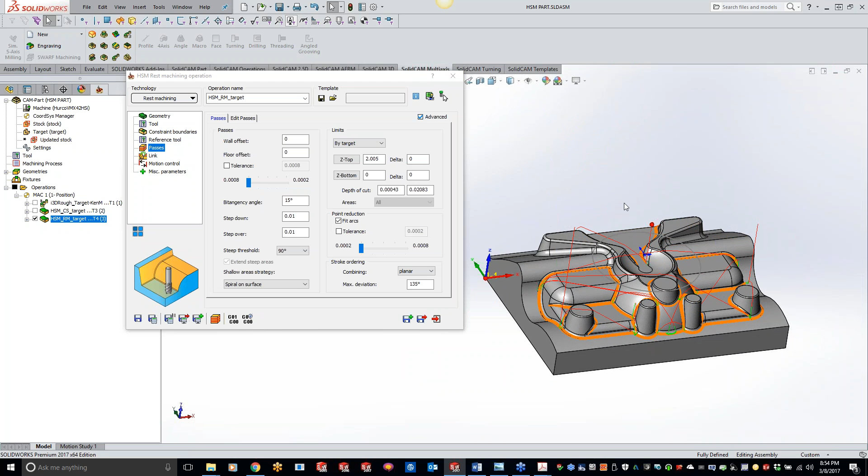Yeah, Kevin, doesn't appear to be anything so far. Hopefully we're not putting them to sleep, Brendan. Well, I mean, silence is golden. That's what they say. Yeah. All right, 3D constant step over. There we go.

Just one thing I'd like to comment on, Kevin, as you're opening this next part, is everything that you're showing here tonight is really super cool because it's showing the level of control that you have over all of the toolpath. A lot of other systems out there claim it's full automation, it does everything for you, you don't have to think about it. But from all of the machinists that I know, including yourself and Ken and Scott and Greg and all the people that we work with, all of these guys really want that minute level of control. Oh, absolutely. And so it's super cool that you're showing this tonight. So,

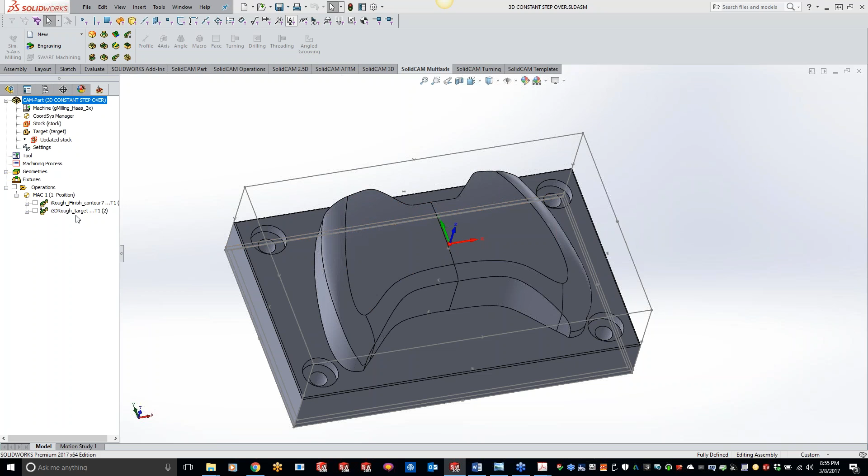Automation is good for hole drilling and hole recognition and that kind of stuff. But I think that's probably about as far as it goes. You really want to have the ability to drill down and have that super precise control over these toolpaths. Yeah, absolutely. And very cool. We definitely have all the areas to control whatever we want here.

Okay. Definitely. So what controller is that? Is that an Xbox controller? Looks like it. Sure. I'm not much of a gamer, but okay.

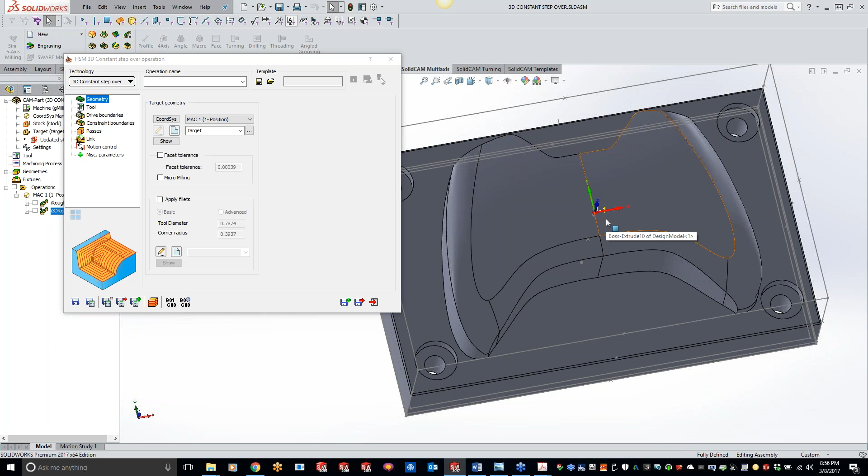So going to do another 3D constant step over here. Just throw some quick toolpath down and have basically a finished off part here. So what I'm going to do is grab our tool here, use our ball end mill, our drive. I'm going to have it follow the outside perimeter here. And same thing for the constraint. Contain it just to my 3D area that I'm looking for here.

And we'll leave everything centered. This one I'm going to have it step down, but we'll leave it as 0 for right now. Passes, I'm going to tell it to go to that point right there and maybe to stay above by 10 thou. I don't want to reverse my, well, actually, no, I want to start from the center on this one. Save and calculate real quick.

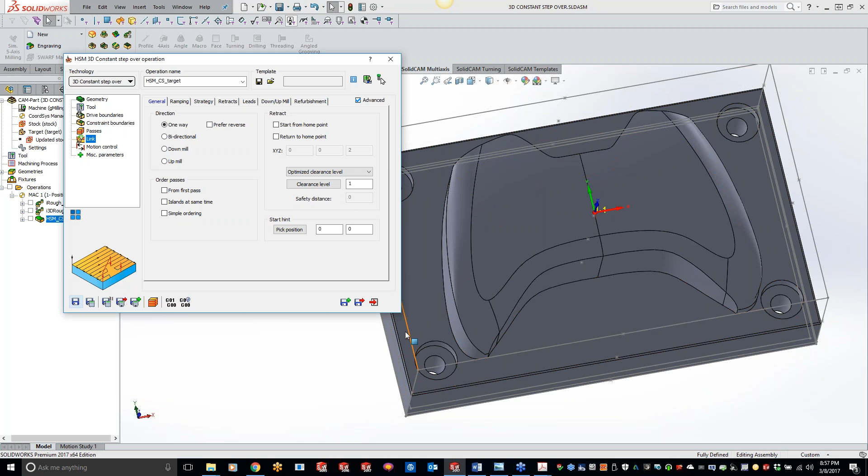All right. And nice toolpath right there. Starting from the center, working our way out, kind of following the contours of everything that's going on here. Now, if I want to get a little bit farther down on my wall here, what I can do is do an offset. So I want it to go down, let's see what this gives us here. And now we're getting all the way down to the floor here.

Now, we do have a little bit of repositions going on, so we can come to our passes, or I'm sorry, our link, and turn our bidirectional on. Should have done that first here. So, real nice toolpath. We're going to get a real nice finish out of this part here.

Now, one thing I've been kind of skipping over here is under 3D constant step over, we do have limit of offset numbers. So what you can actually do is you can actually limit your lines. So let's say we just want to do 5 lines. Do save and calculate real quick. And it should do the outside perimeter. Yeah, it's just going to do the outside perimeter 5 lines.

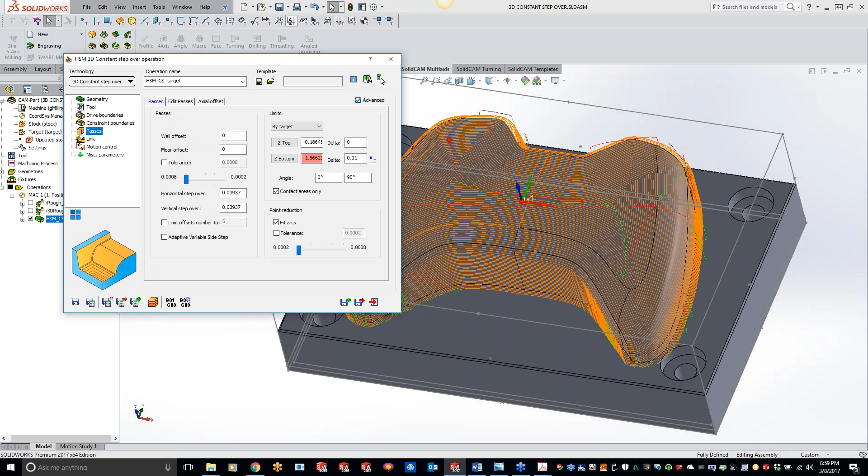And the adaptive variable side step. So basically, how that works is kind of like a projection. So as the Z steps down, or as the wall of that Z goes steeper and steeper, the toolpath actually is automatically adjusting for it and getting farther and farther apart. So a good example is you'll see how close our lines are here. And as they get farther around more to a vertical wall, our step overs are much greater. So that's the adaptive variable.

So we're not wasting time doing those continuous toolpaths on a straight up and down wall by stepping down just that small minute. So definitely if you guys are doing basically straight up and down walls only with a 3D surface, that's where you want to turn on your adaptive variable side step. So, any questions with this part?

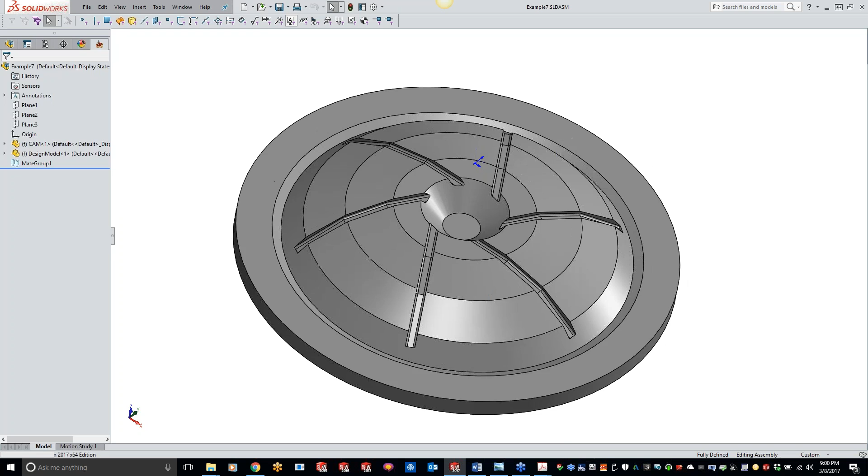All right. Yeah, Kevin, nothing so far. I think most of the questions really were kind of about hardware tonight, which was kind of interesting. Yeah, so maybe we should think about doing a session some other time on... Absolutely. Something like that. But if you have something else to show, please do.

Well, this is my last part, and for those of you guys that know Sydney, Sydney is our SolidCAM professor, and I asked him, hey, got any good parts for 3D constant step over? And he hands me this thing. Yeah, what the hell is that? I don't know, it's pretty big. He's like, I want to see it cut, so we're going to cut it for Sydney.

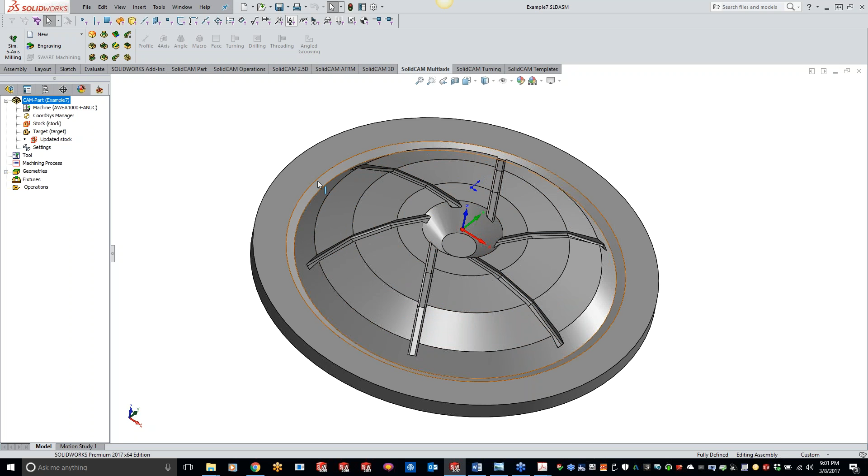But like I said, with this particular one here, this would be a 5-axis, well, actually, no, not 5-axis. We could do these internal fillets here using different toolpaths. But what I'm going to do is skip over the internals here and just get our general toolpath on the outside. So we'll just do our 3D HSM here. Got our constant step over. I think I have a tool in here. Yep, one and only tool.

And we'll just leave this on automatic and leave this one automatic passes. This one is in metric, so that's why it's showing 1. Sydney sent me the part in metric, and those foreigners, they like their metric. So save and calculate here. Oh, dang, I forgot to reverse it.

Yeah, and literally Sydney hit me up about 20 minutes before the class started and said, I want to see this one. So this is definitely way off the cuff here. Hey, Kevin, all the greats have their moments. So this is your Waterloo right now. So time to shine. All right.

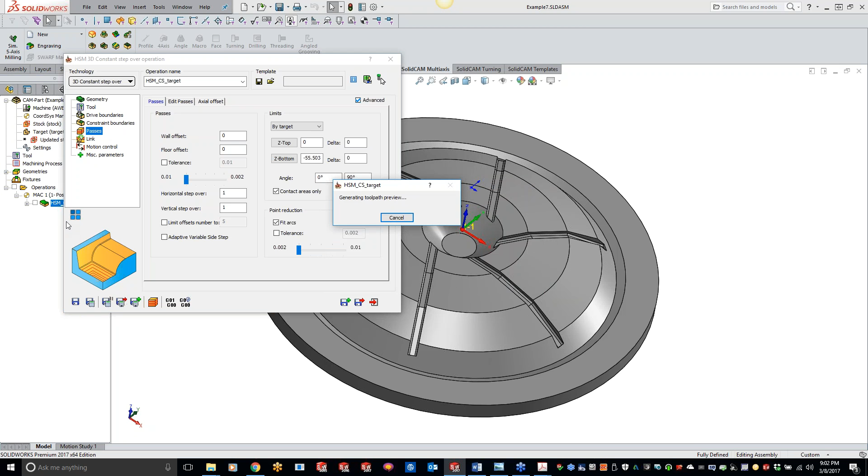Yeah, okay. What's cool too, and what's the diameter of that part, Kevin? It seems like it is, well, 350 millimeters. So. Oh, look at that! He's got to convert it. Yeah, I got to convert it. So about 14 inches. That's awesome.

I love that. I do the same thing with my Canadian customers. For everybody listening now, yeah, I do the same thing. They're like, well, but actually, you know what, Kevin? What they asked me to do is convert the U.S. dollars into Canadian dollars. So I'm like, well, I don't know if I can do that, but I'm sorry. Please continue. Thank God for Google, right?

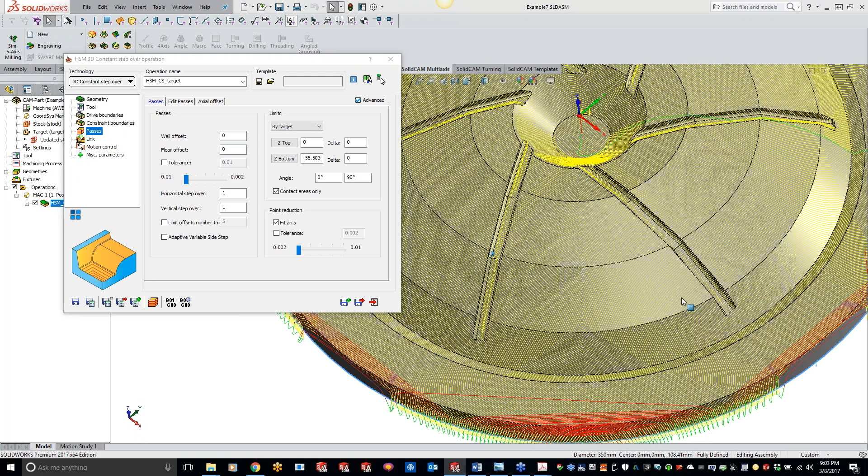Right. Okay, so this is just standard right off the cuff. So now what I want to do is, if you look here, I'm getting some more straight lines going on here, and I want more circles in there. If we zoom in here, you'll see we're getting straight line movements here, and then we're getting a lot of reposition.

So what I'm going to do to clean up that toolpath is come to my drive, do manual, grab that guy, and now we should get a real nice spiral, starting from the outside, working our way in.